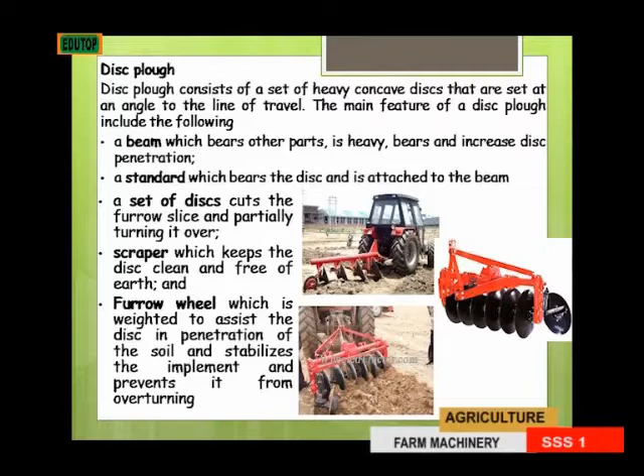We can see in the diagram that we are having here a beam, which bears other parts. The beam is very heavy, and it also increases the disc penetration, that is, the weight of the beam helps the disc in penetrating the soil so that it can cut and pulverize it properly.

It is also made up of a standard which bears the disc and is attached to the beam, just as what we are having here. The disc plow is also made up of a set of discs that cut the furrow slice and partially turn it over. The disc might be serrated or might be fully circular.

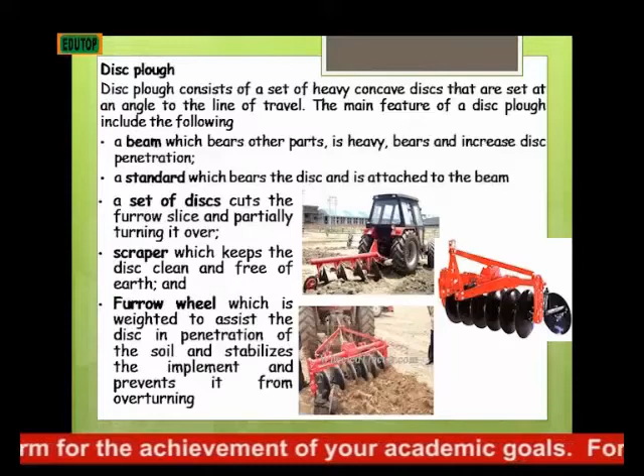Then it's also made up of a scraper which keeps the disc clean and free of earth, that is, it helps in removing the soil from sticking to the disc. Then it is also made up of the furrow wheel, which has weight that assists the disc in penetration of the soil, and it also helps in stabilizing the implement and preventing it from overturning.

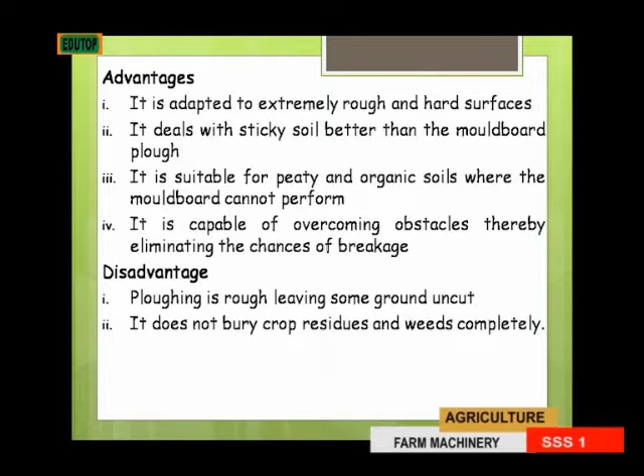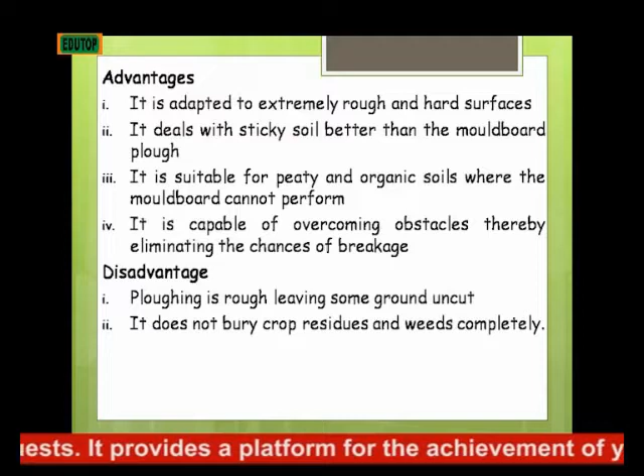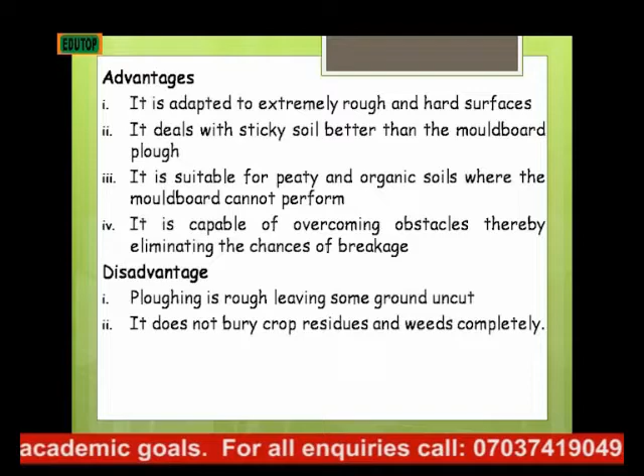Now look at the advantages of the disc plow. It is adapted to extremely rough and hard surfaces, unlike the moldboard plow. It deals with stickier soil better than the moldboard plow, and it is suitable for peaty and organic soil where the moldboard plow cannot perform. The fourth advantage is that it is capable of overcoming obstacles, thereby eliminating chances of breakage, due to the fact that the disc is made of hardened steel.

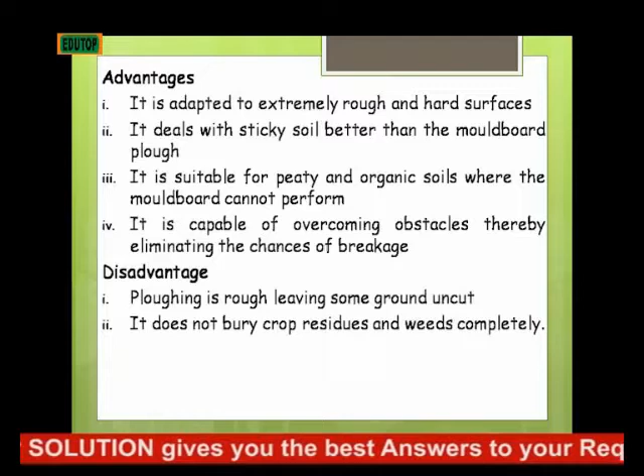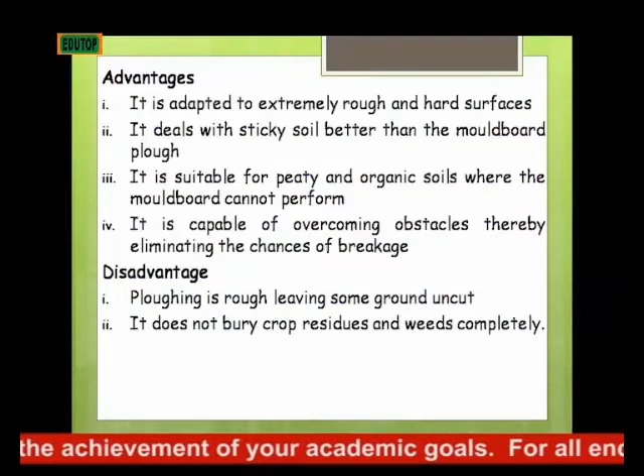The disadvantage is that plowing is rough, leaving some ground uncut, unlike the moldboard plow, where plowing is always fine and there is complete overturning of the soil. Another disadvantage is that it does not bury crop residues and weeds completely.

Now we'll be looking at harrows, which is a secondary tillage implement. The plows are primary tillage implements, while the harrows are secondary tillage implements. What I mean by primary is that the first pulverizing or tillage operation to be carried out is called primary, while other tillage operations are called secondary.

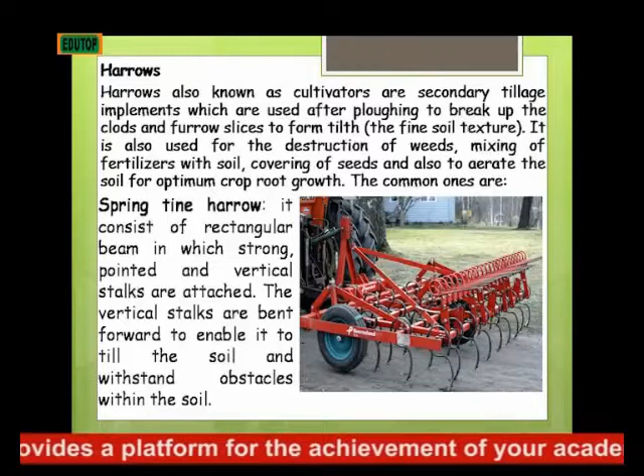Now we'll be looking at harrows, also known as cultivators. Harrows are secondary tillage implements used for further breaking up of the clods and furrow slices to form tilth, that is, fine soil texture. It is also used for destruction of weeds, mixing of fertilizer with soil, covering of seeds, and also to aerate the soil for optimum crop root growth.

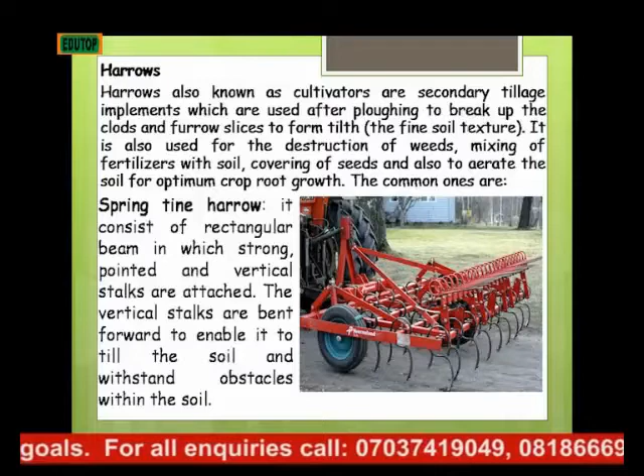The common ones are, and the first one that we're having here is the spring tine harrow. It consists of a rectangular beam in which strong, pointed and vertical stalks are attached. The vertical stalks are bent forward to enable it to till the soil and withstand obstacles within the soil.

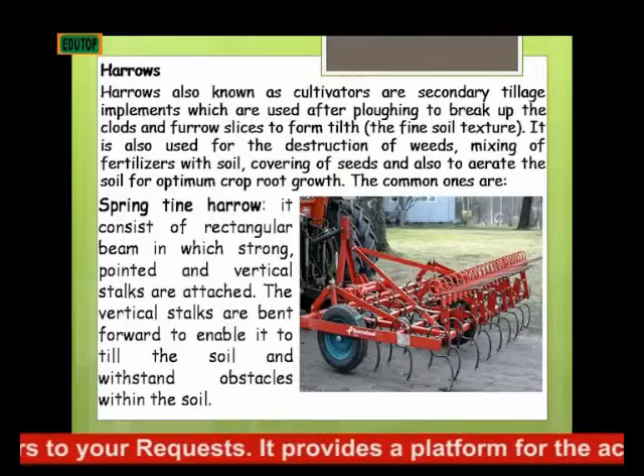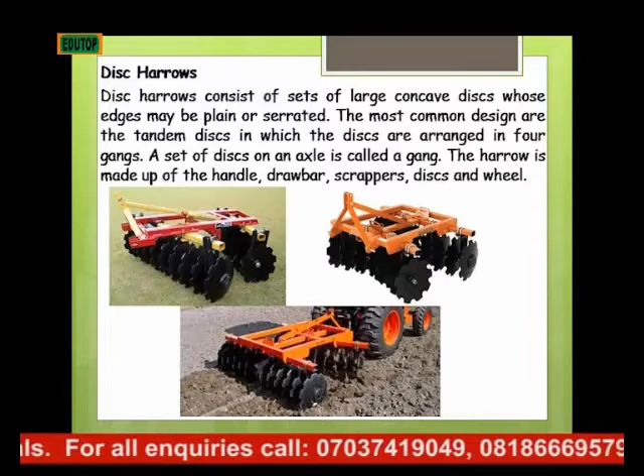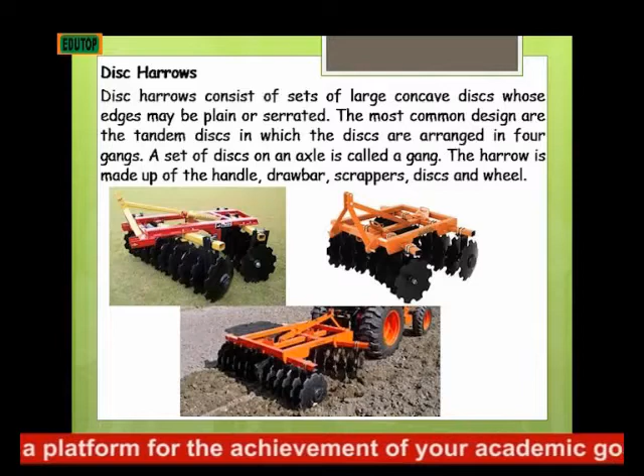Now we'll be looking at the disc harrow. We've dealt with the spring harrow, and now we'll move to the disc harrow, one of the types of harrows that we're having. The disc harrow consists of a set of large concave discs whose edges may be plain or serrated. The most common design is the tandem disc, in which the discs are arranged in 4 gangs. A set of discs on an axle is called a gang. The harrow is made up of the handle, the drawbar, the scraper, the disc, and the wheel.

Now the next implement we'll be looking at is the ridger. It's also a secondary tillage implement. The ridgers are implements used for making ridges. The two common types are the disc and the mouldboard ridger. The disc ridger, which is like the disc plow, is preferred to the mouldboard ridger in the tropics due to the advantage mentioned earlier about the disc plow, that is, being able to overcome obstacles.

In operation, the disc ridger makes ridges by each disc throwing or making out half of the ridge, which is completed by another half thrown out by an opposite disc. That is, the discs are facing each other, and when the first one makes the half and the opposite one makes the other half, it makes a complete ridge.

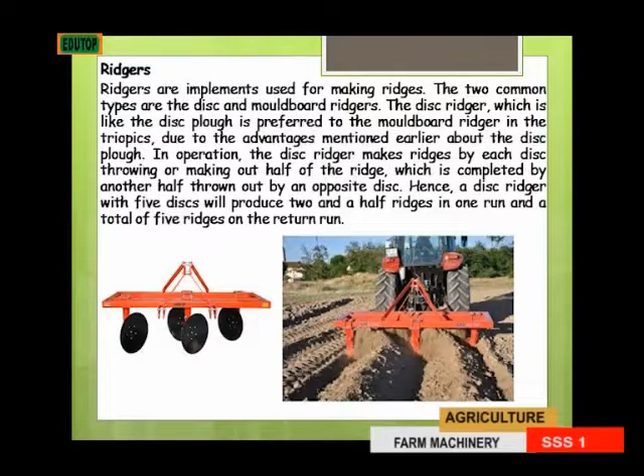When we have 5 discs, that is, a disc ridger with 5 discs, it will produce 2.5 ridges in one run. Since we know that a disc produces half a ridge, 5 divided by 2 gives us 2.5, which means a ridger that has 5 discs is going to produce 2.5 ridges in one run.

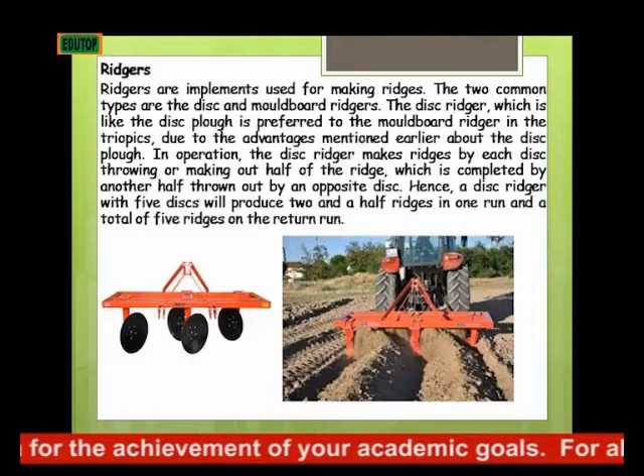And when it is returning, it will make another 2.5 ridges, which will give us a total of 5 ridges.

Now we'll be looking at planters. Planters are power operated implements, though we also have a manual one when using a cutlass, and other semi-manual planters. Planters are used to plant seeds, stem cuttings, tubers, or seedlings in the soil. In general, planters open the furrow and drop the seed in it, covering up the seed afterward, except for broadcasting where the seed is simply dropped on the soil.

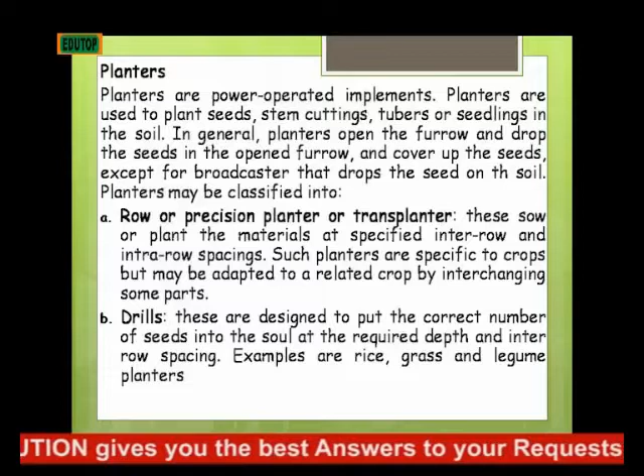Planters may be classified, the first being row or precision planters or transplanters. These sow planting material or seed at specified inter-row and intra-row spacing. Such planters are specific to a crop but may be adapted to a related crop by interchanging some parts. For example, if a planter is meant for maize, we can still adapt it for planting sorghum or millet, but the only thing we might need to change is the metering device.

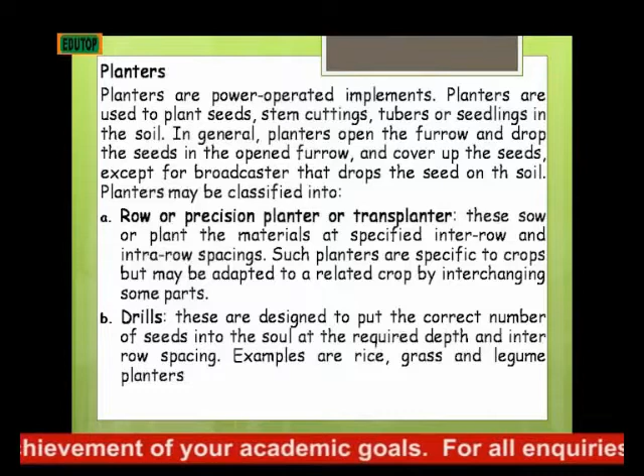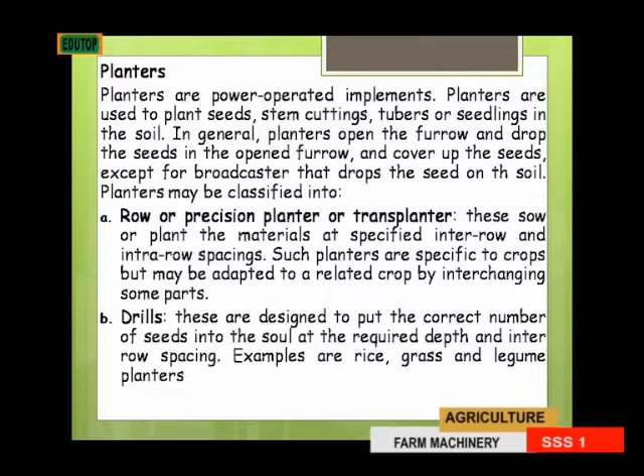Then another type of planter we have is the drill. These are designed to put the correct number of seeds into the soil at the required depth and inter-row spacing. Examples are rice, grass, and legume planters.

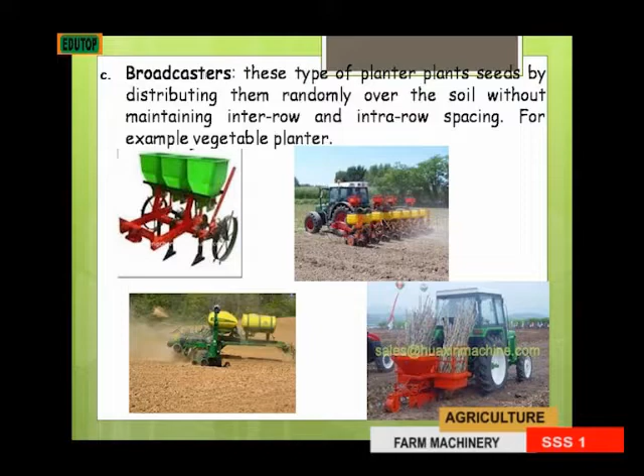The third type we have is the broadcaster. This type of planter plants seed by distributing them randomly over the soil without maintaining inter-row or intra-row spacing, for example the vegetable planter. It only spreads the seeds over the soil, which can later be harrowed back into the soil so that the soil covers it.

The major components of a planter include the following: the hopper, which holds the planting material, whether seed, stem, stem cutting, or seedling; and the furrow opener, which opens the planting point in the soil.

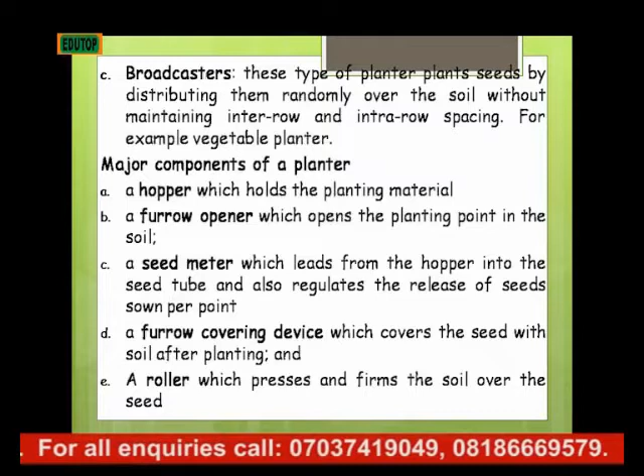Then we have the seed meter, which leads from the hopper into the seed tube and regulates the release of the seeds sown per point. That is, it helps us if we want to plant, say, 2 seeds per point. It's a measuring device that controls and won't just allow the seed to pour into the planting point that we actually want to plant.

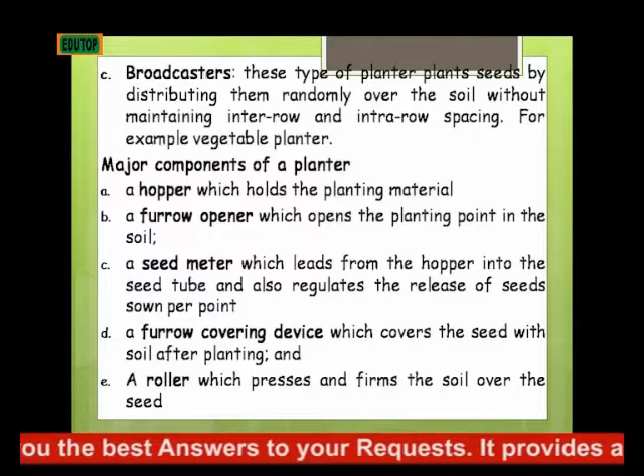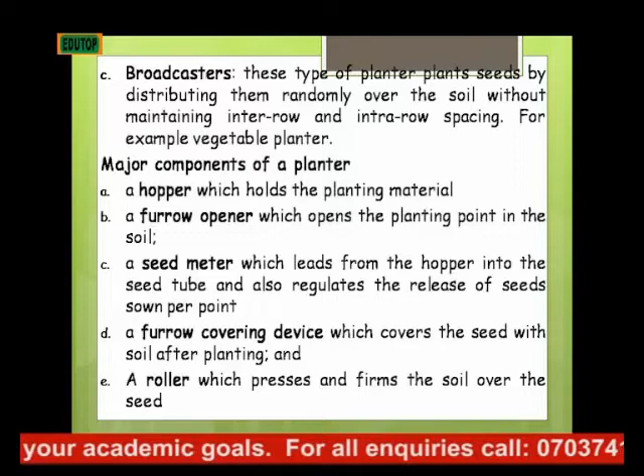Then the fourth component is the furrow covering device. After the furrow opener has opened the soil and the seed meter has dropped the seed, it's the furrow covering device that covers the seed with soil after planting. Then we have the roller, a component which presses and firms the soil over the seed.

Now with that we've completed, we are through with the planter. Now we'll be dealing with the harvester.

These are implements used for harvesting crops. They include mowers, used for harvesting grasses, the forage harvester, and the combine harvester. There are other types of harvesters too, like those used for harvesting citrus, oranges, and the like, and those used for harvesting tubers and roots. But here we'll look at the mower, forage harvester, baler, and combine harvester, one after the other.

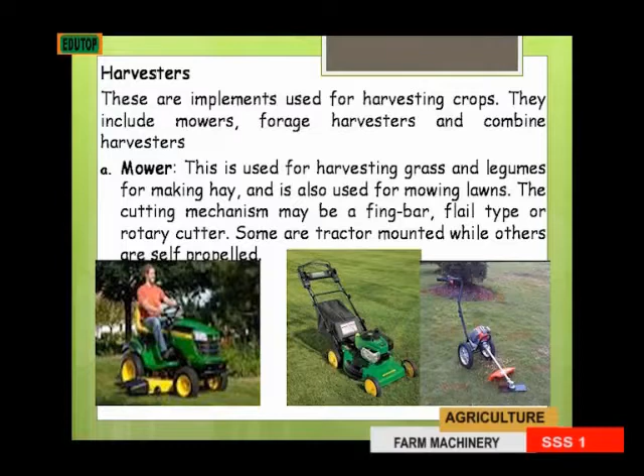The mower is used for harvesting grass and legumes for making hay, and is also used for mowing lawns. The cutting mechanism may be a finger bar, flail type, or rotary cutter. Some are tractor mounted while others are self-propelled, as we can see here.

Then we have the forage harvester. It's a tractor mounted implement with a plant cutting and chopping unit. A trailer normally operates beside the tractor for collecting the chopped forage.

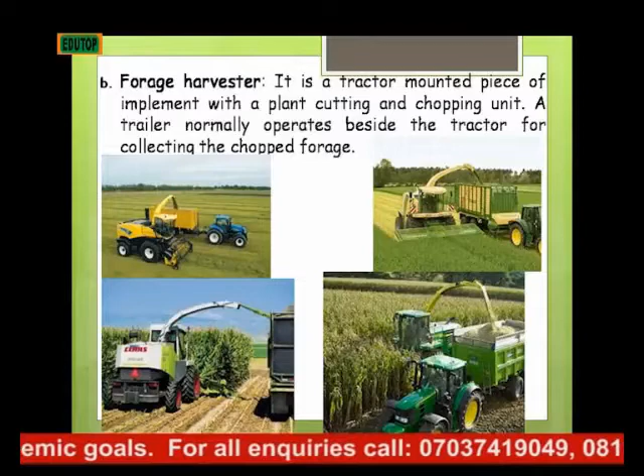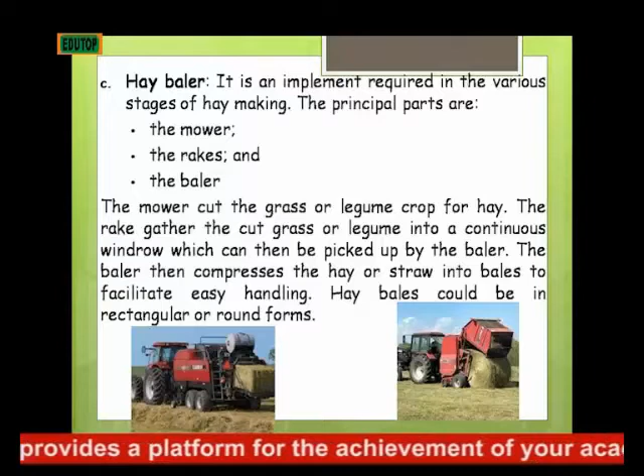Now the third one is the hay baler, as you can see here. It is an implement required in the various stages of hay making. Its principal parts are the mower, the rake, and the baler. The mower cuts the grass or legume crop for hay, while the rake gathers the cut grass or legume into a continuous windrow, which can then be picked up.